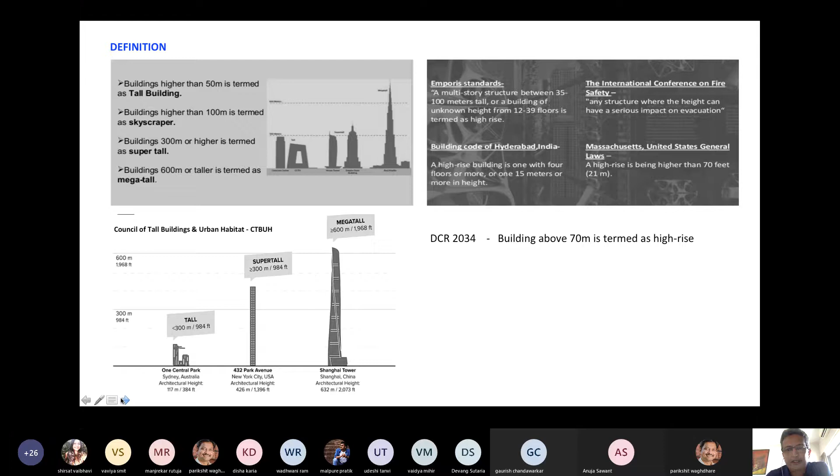Those are basically norms which you need to follow. For example, a building less than 70 meters requires only one staircase. Buildings above 70 meters require two staircases. Then there is a fire check floor, and the number of lifts increases. So those are the regulations followed as far as different DCRs worldwide are concerned.

Now, why is there a need to go tall? Number one is scarcity of land. Land is getting scarcer and scarcer, and there is always more demand to put more area on a smaller plot size, so the only option is to go higher and higher. Then there's always a demand for residential and office spaces, economic growth. Technological advancements is also one of the key factors driving high-rise buildings to go taller—advancements like steel buildings, composite buildings, prefabricated buildings, etc.

Then there is a human aspiration to build higher and higher. Everybody wants to stay at a height. Height is envisaged as premium—like if you're on the 20th floor or 30th floor, it's supposed to be some kind of prestige symbol, saying 'I'm living on so-and-so floor.' And then there is this race to compete for the title of the tallest.

There are many examples worldwide, like the Burj Khalifa in Dubai, where the tallest building has put Dubai on the world map. There was the Petronas Towers, which did the same thing for Malaysia. The reason for going tall is just to make a kind of statement—that's the basic reason. But as far as the Indian scenario is concerned, the reason to go tall is basically scarcity of land, nothing more, nothing less.

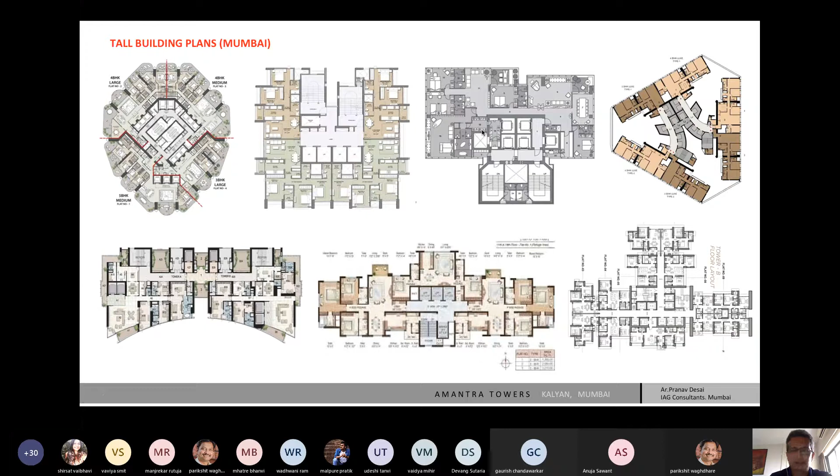Now these are the three projects which we have chosen from our office, because they are drastically different. The reason for choosing them is that all three are very different, having a different context, different methodology, different way of approach, and different design.

Number one is the Amantra Towers at Kalyan, which is an affordable housing complex, and it's again a mix of high and low rise buildings. Excalibur Towers is at Mahalakshmi, which is a luxury tower on a very small lot size—the plot is only around 1500 square meters—and we have tried to achieve a mix of the rehab component as well as the sale component.

And the third is the Vivaria towers, which are very high-end luxury towers with a very low density in terms of buildability. So basically we'll go through these projects and I'll explain how market forces, end user requirement, and construction technologies help govern the design of buildings. In my experience, these three are the most important parameters which influence the design of buildings. Other things like structural design parameters, sustainability, climate, form, etc., are basically byproducts of that.

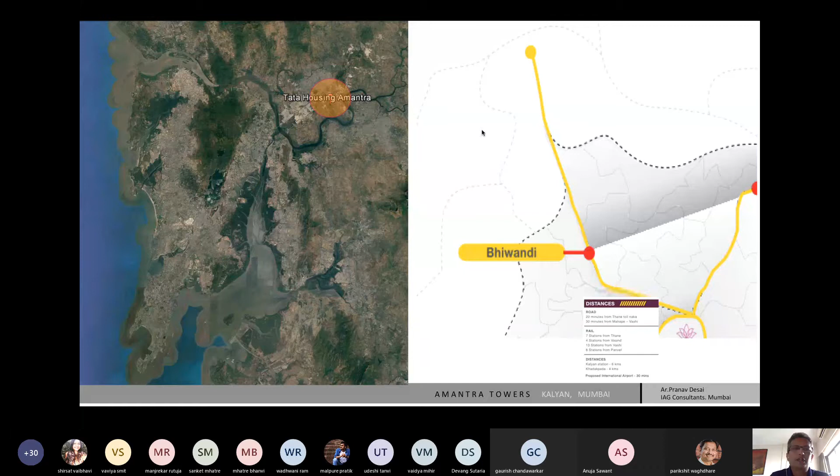So this is the first project, a project for Tata Housing called Amantra. The site is situated on a very busy road, in the junction of Kalyan—this is the Kalyan junction, and this is the road going towards Bhiwandi. This is basically around a 25-acre site.

Phase 1 is almost complete, we are just starting phase 2, and it's got a range of high and low rise buildings. There are around 11 35-story towers sitting on a parking podium.

Now this is the basic layout of the project, where you have to see phase 1 and phase 2. First, what we did is we aligned—when we started this project it was under the rental housing scheme by the government of Maharashtra. Rental housing is basically a scheme where the government allows you to build a higher FSI, provided one FSI you give for the rehab of people affected by, say, road widening, or people affected by slum clearance or any other infrastructure project.

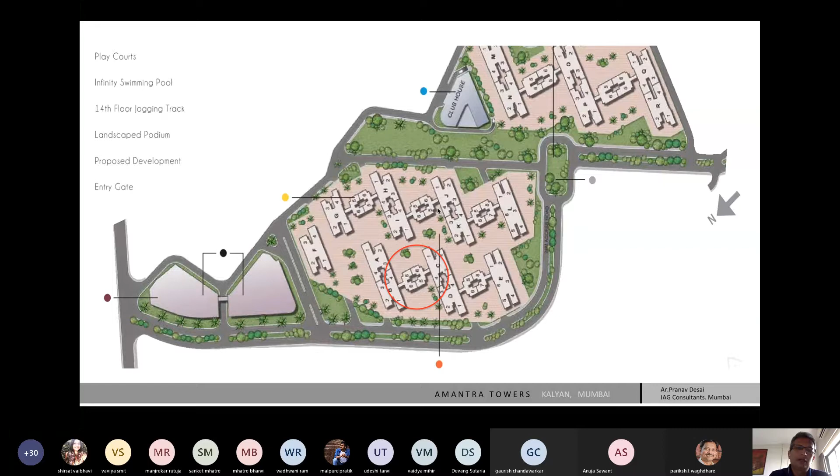So we developed a system where we did a low rise and high rise combination. The main reason was to develop a construction methodology where we plotted the radius of the crane movement and then plotted the buildings onto the site. So these 11 towers were constructed with the help of 6 cranes, which moved in a direction, and one crane was used by 2 towers. The location of the crane was in the center of the smaller building. Once the towers came up to like 12, 13 floors, then the work on the lower buildings started.

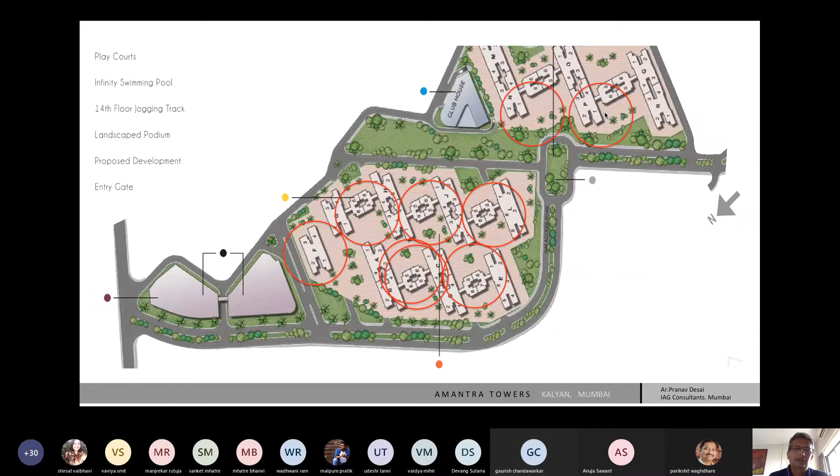So what I'm trying to tell you is that it's not the form, not the climatology, not the sustainable parameters, but the drive to use construction technology and methodology which actually evolved the design. This is how the project looks like, a combination of large towers - these are the 11 towers which are built - and then you see these smaller towers in between.

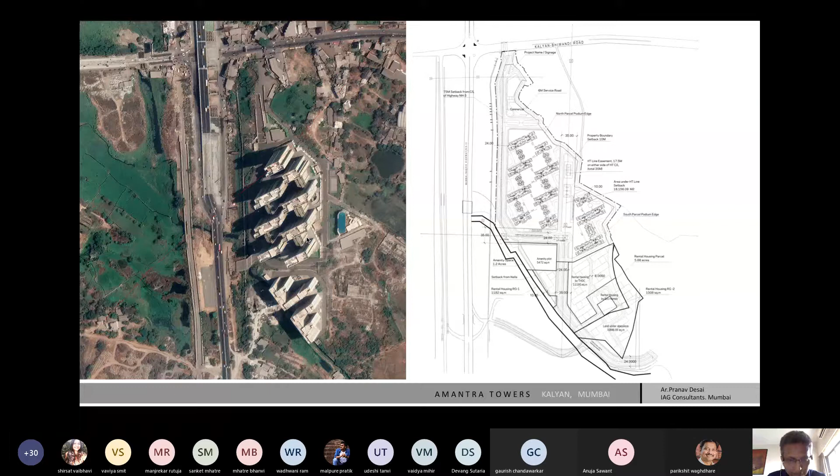So this is basically the configuration of how the units are placed on the site. Again, there is a method to this. It looks like total madness, but there's a method - intentionally 3 bedrooms are towards the flanges where you have the optimum view. The smaller units are towards the center. This is again market driven. 3 bedrooms require more premium and have a larger ticket size, so give them a better view, better location.

So the design is driven by market forces. What sells, that is put into the design. 2 bedrooms are towards the center, and you see all the 3 bedrooms are towards the periphery.

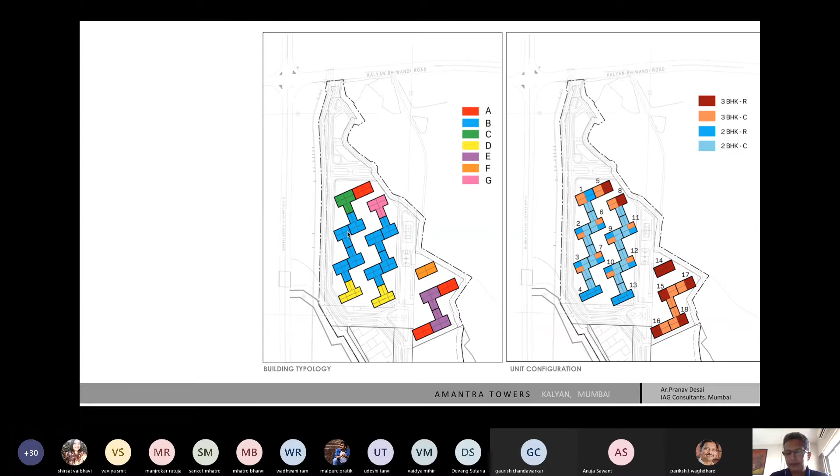Again, because we were using technology, we had to standardize the units. We could not do, say, a 2 bedroom and make 5 different varieties of 2 bedrooms. We needed to do 1 or 2 types and repeat that more number of times to get efficiency in terms of how the Mivan formwork operates, because for each tower we had basically taken one set of formwork, which was getting split into phases.

So you have these 11 towers which were built, 35-story towers, and the lower portion is the smaller building where the tower crane used to sit first and then operate these buildings. Once the buildings came up to say the 15th floor, then the work of these buildings started. These are called the bar buildings - I don't know why they call them that, but the client had called them the bar buildings.

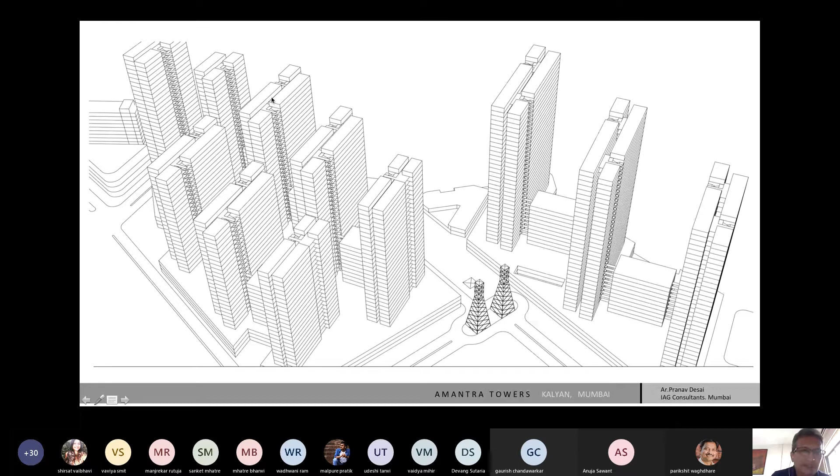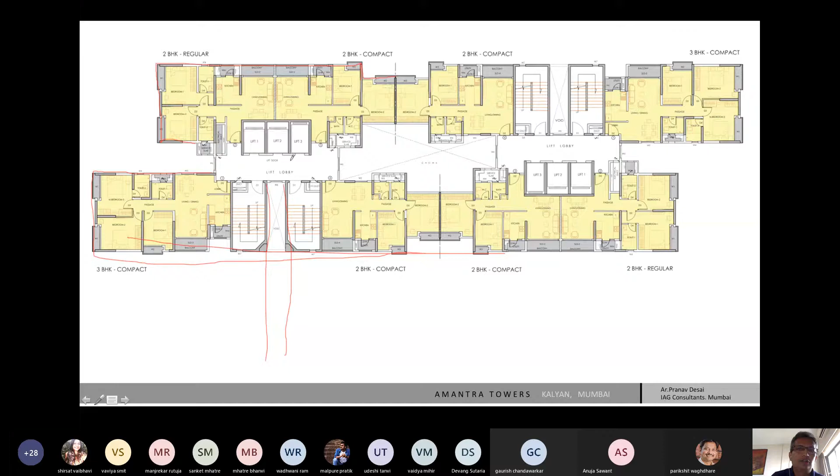So on the lower floors, it is 6 flats to a core, but when you go higher, above 12 floors, it is 4 flats to a core. So you can see this passage. So you have 6 flats to a core on the lower floors, and then these towers rise up to form four flats to a core.

And so there is again a hierarchy of the buildings. Whichever is going higher are the bigger flats, and whichever are remaining smaller, like the bar buildings which are 12 floors, those are the smaller flats. That also is driven by the market, because the compact flats have a lesser ticket size, so it will be more affordable and more efficient to keep them low rise.

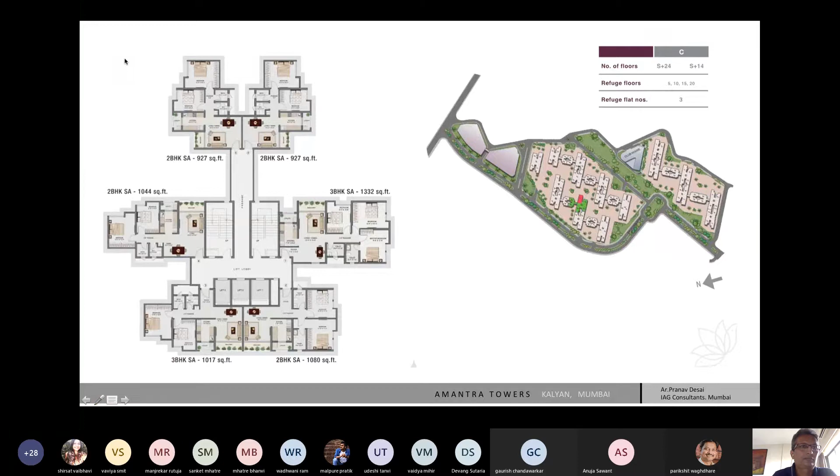This is again the same thing. It's four and two in the bar building, and then again this is the mirror of that. So you can see this. You have two staircases, 3 lifts. Again, you have very straight block kind of things. And this is the mirror. So the next building is just a mirror of that.

So when you're using technology, suppose there are 11 buildings, you need to try to keep 1 or 2 types. Because repetition is the key word here. If you don't have repetition in your design, then it becomes extremely uneconomical when you're using technology.

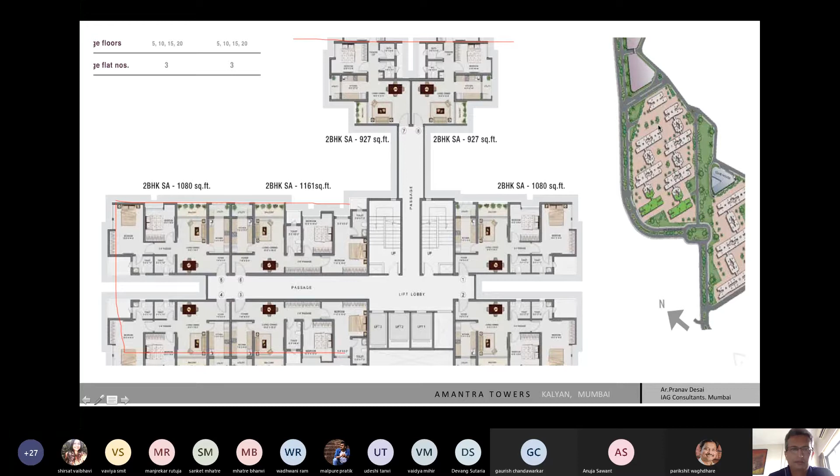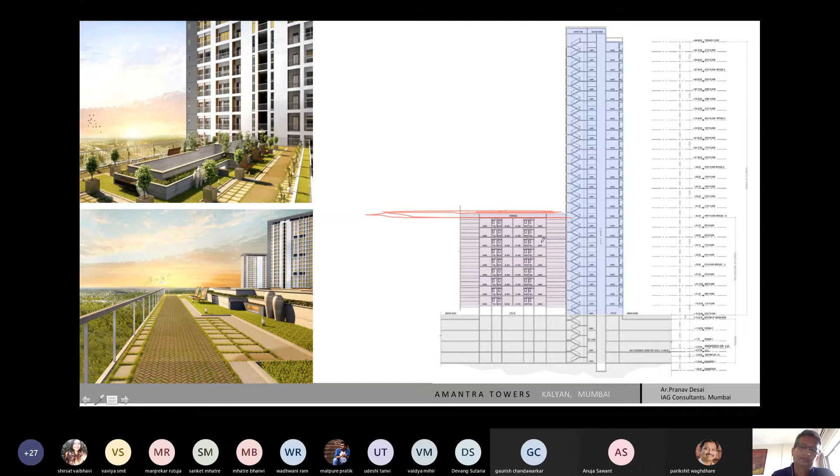Very few people will know this, because everybody thinks it is done mainly to achieve an interesting form, that because it's a 4 FSI high density project, the architect has done this staggering skyline, but the reality is very different.

And when you're doing tall buildings, another thing is that you basically don't have many options in terms of the facade because it's all concrete facade. From the ground till the terrace, the formwork has to basically go the same. From this level till the end, it has to go in one shot. So you cannot put any stick-ons or do anything which is superficial. At maximum you can work on the crown or on the lower portion of the building.

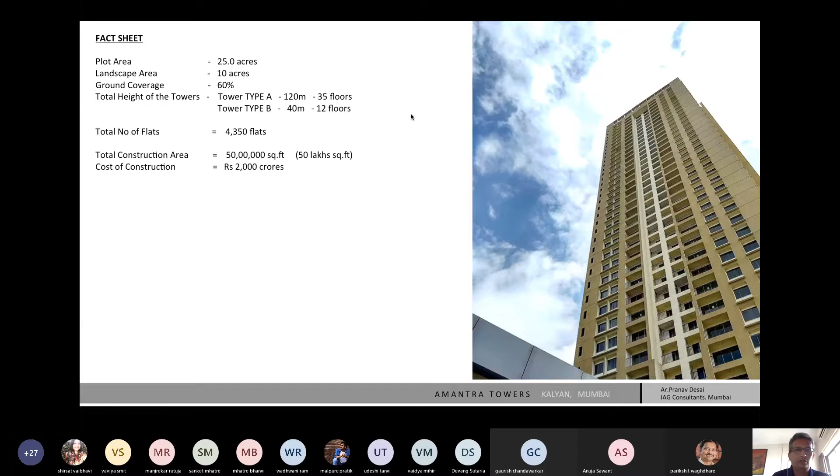And totally around 4,350 flats and around 50 lakh square feet was the construction area, and the cost was around 2,000 crores. So this is one of the projects which was in the affordable segment category. Now we'll move on to another project which is high end but high density.

It's a small building at Mahalakshmi. It's under the 33/7 scheme. It's a scheme by the government where you have a plot of land where there are tenants or tenements which are already existing. So you have to rehouse those tenements into a separate building and then create your own sale building.

So you need to basically carve out a space for them. At the same time, you can build your own tower. So normally, one is the density which is actually used by the tenants, and 3 is the density or the FSI you get for building the new project. Now 3 is the FSI, so total construction will work out to 7, 8 because of the parking, lift, staircase, etc.

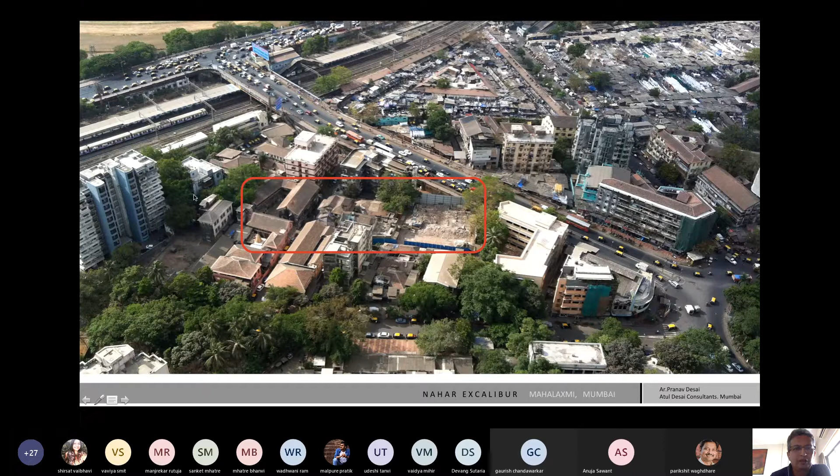So this is all market driven. Form comes later on. The condition is that every room of the flat should get this kind of a view. This is the site. You come down from the bridge. This is the access. Now this is a very peculiar site because it's a long site, but it is cut into two by this road. So you have this 1/3 land which is carved out, and the 2/3 land is in one chunk.

So what we did is that there are 2 rehab buildings which are shorter, only 70 meters, and the taller one is the sale component. So these 2 are the rehab buildings, and this is the sale building. Now we had to keep this building over here because this is the immediate access to the building. This is not a very good road, so we could not use this for the sale component. So we kept the rehab component on both sides of the road and built the sale component towards this side.

Now, even though the race course is here, we didn't have an option because of the site. We could not angle the building, because if you do that, then there'll be a lot of inefficiency in terms of the design, in terms of the parking. So we had to keep the building more or less aligned with the site. So that was one of the restrictions of this very, very tight site. So this is your entry. I'll just go to the typical floor plan.

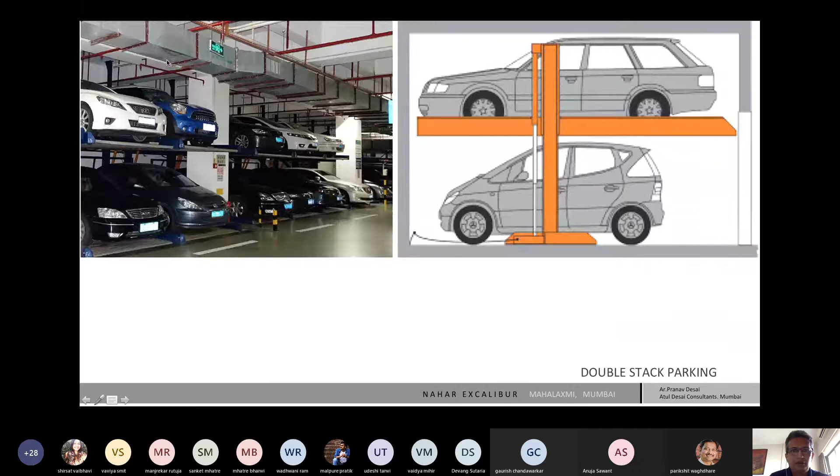It should be seamless. You cannot plan it in isolation. You cannot do a typical floor plan and then fit in the parking, because that will never work. So even if you see the grids, we designed the width of the bedroom such that you get 1 car parking. Then these columns were floated, so you get exactly 3 car parkings below that. Then the living room was used for the car lifts.

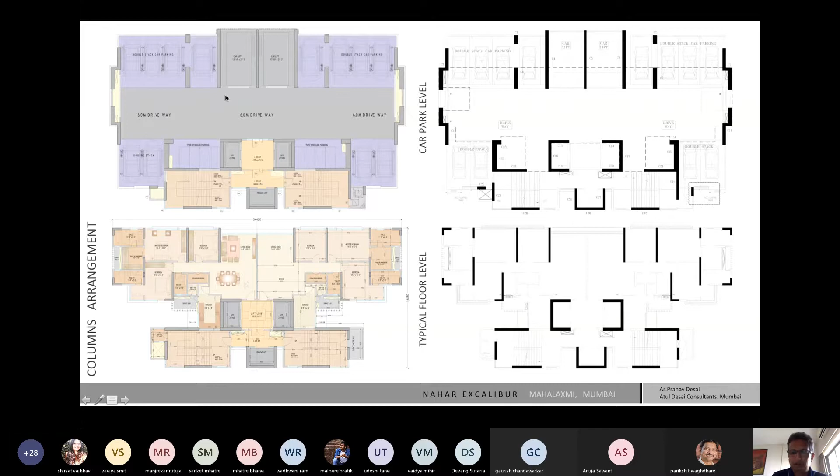So the parking structure below the tower was very, very efficient and required minimum floating of columns. There were certain floatings which were inevitable, but it was very workable. It was not something which the client would cry about. So this is your typical floor. The living room gets the view, bedroom gets the view, master bedroom. Even the toilets get the view of the racecourse and the Arabian Sea. Even this gets the view from the back towards the Mazgaon docks.

So what I'm trying to say here is that the planning is not done because of form. It's not done because of sustainability. It is driven, it is designed for the market. The market wanted that every room should get the view of the racecourse. So that is the reason why this typical floor is designed the way it is.

The end user requirement: if you wanted some flexibility, if these 2 rooms want to be combined, or if you want to increase the size. Now there are many who have redone this area. So you need to have this kind of flexibility built in. If they don't want a puja room, they don't want a servants' room, if they want to increase the kitchen, if they want to keep 1 walk-in wardrobe and make this a study. So all those flexibilities need to be built in the design stage itself.

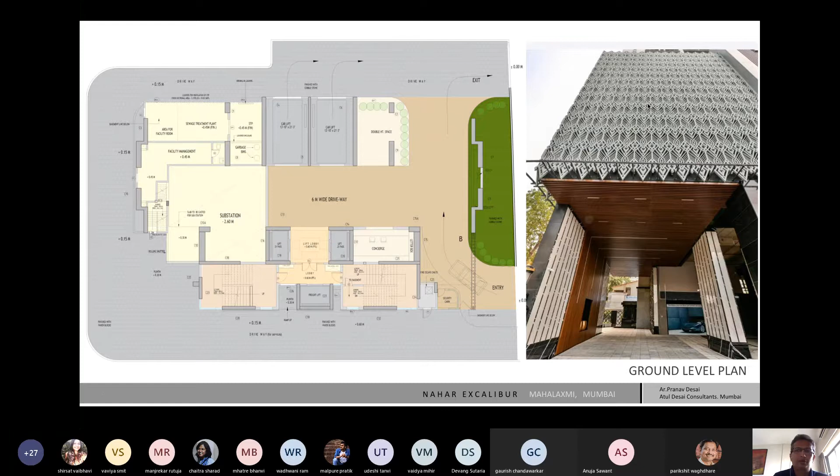So the design is going to get more and more complicated, where you have a rehab component, sale component, parking for the sale, parking for the rehab, amenities, etc. All clubbed in a lot which is actually half of what is required. So you enter into the porch. This is the large entrance lobby, double height, because even your entrance lobby needs to have a scale which justifies your building. This is the puzzle parking system.

And because the space is so tight, a lot of amenities are now pushed onto the terrace level. So the terrace is a community space where you have walking spaces. Some people have swimming pools and clubhouses on the terrace. Earlier the terrace was all services, but in today's day and age, the terrace is where all the recreational activities are coming up. At least in a city like Bombay, where the ground is all used up for parking and other things.

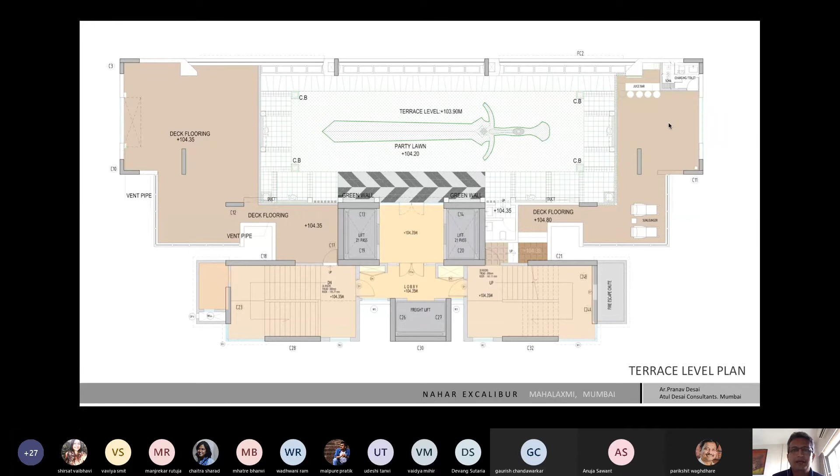This is how the terrace is designed. You have a lot of greenery, plus you get these outstanding views of the Arabian Sea and racecourse from the terrace.

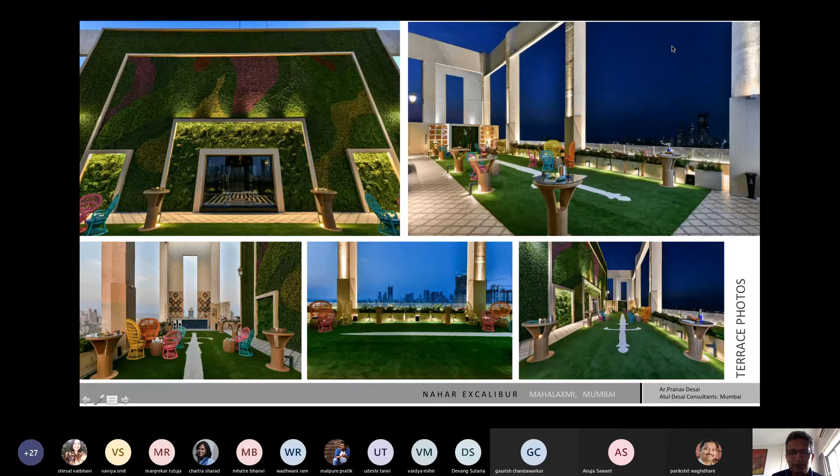Now, when you're designing the facade of a high-rise building, you need to see that maintenance is also a very big challenge. It's not like a small 7-story building where you can put up scaffolding and change whatever you want, or paint or break things. Once it's built, it's there to stand for years.

So normally what we do is that the lower portion, which is like 3 or 4 floors, and the crown are the only treatments given architecturally. The rest of the building goes simple, clean, straight cut, with not much fenestration. This is again a Mivan construction, an all-RCC framework structure. So there is no plastering; once the RCC is done, it's only painted.

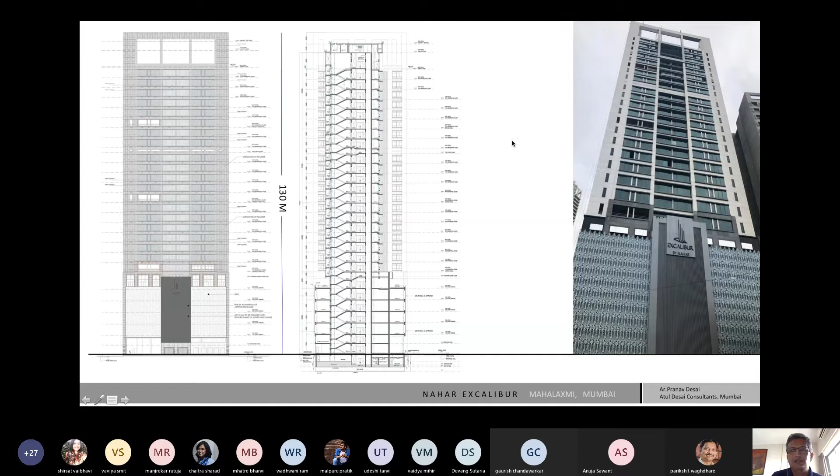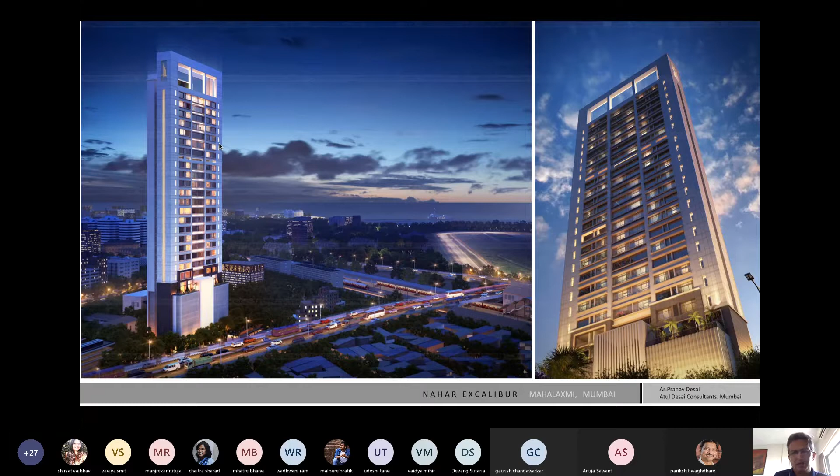So in most of the projects which we have designed, the principal approach is driven by the end user and the market, what the end customer really wants. Whether they want a 3-bedroom or a 4-bedroom, a larger living room, a walk-in wardrobe in one of the bedrooms. Everything is driven by the market, and there's a lot of research which goes in before the architect even gets the brief.

This project is called Excalibur. Excalibur is the sword of King Arthur, so the building is named after the sword, because it's tall, thin, and strong. That was the concept. So we picked up motifs from the sword and created this pattern in GRC, which was then put onto the entire lower portion of the building.

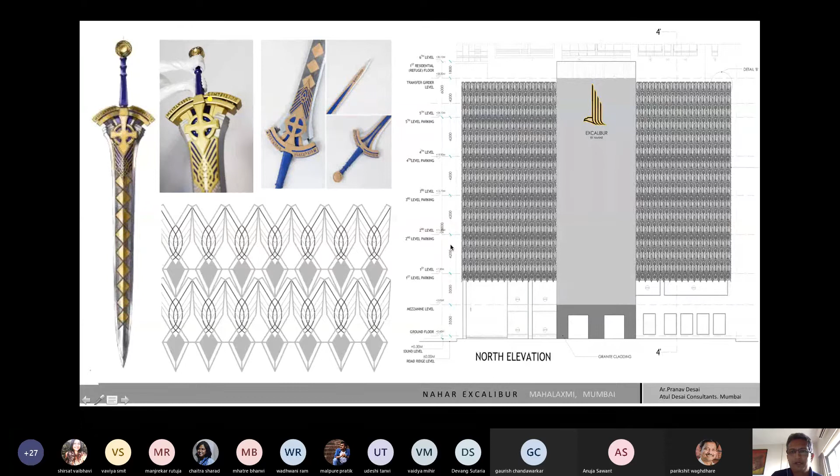This is the motif that was picked up, and then it was repeated, because this was done in GRC, and GRC becomes economical only if you get repetition. So this is one mold which is repeated many times. The entire lower portion of the building is this GRC jali. This is where the car lift is. And the overall building on top is very simple, clean cut lines, a little bit of cornicing, grooves. And then you do certain crowning on the terrace.

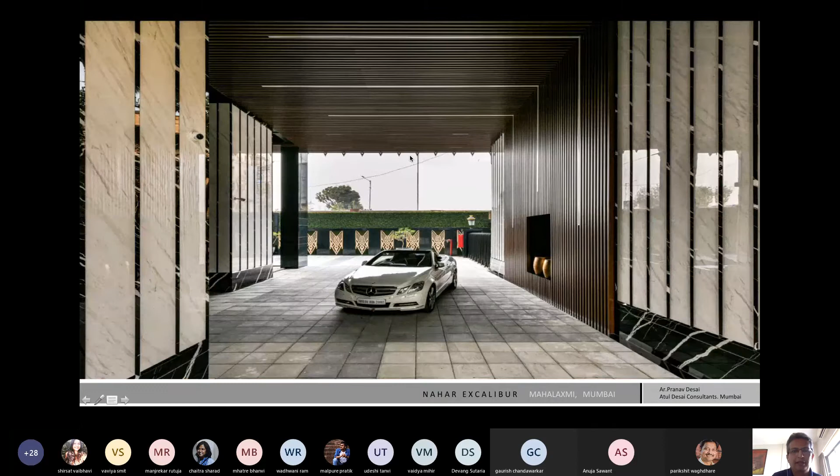Because it was a very large deal, they said, let us give him this kind of feature where in the skyline he can boast that these last three floors are his, by giving this light box, a square box, on the building. So there also is the end user dominance: whoever buys dominates. This was never a feature in the design, but because the end user wanted it, it was put in as a design feature.

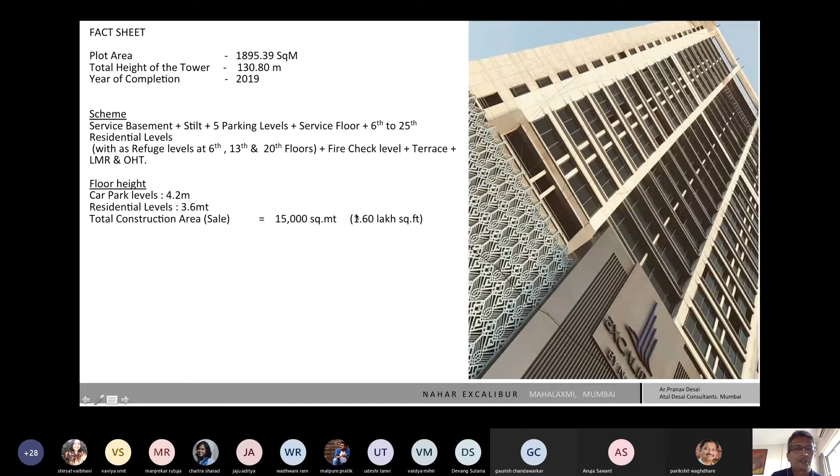So the end user plays a very important role in how you design your buildings. You feel that the architect is supreme, but it is not. The end user is actually the supreme. If you see, the plot area is only 1,800 square meters, the total is around 1,60,000 construction area, and the building height is 130 meters.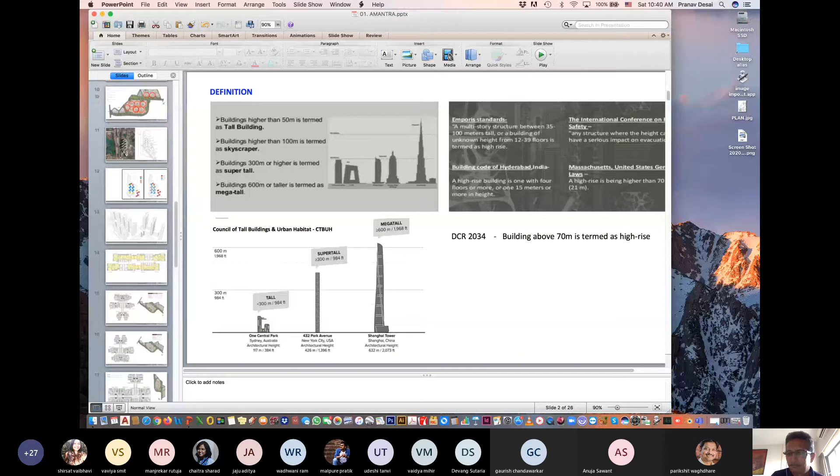So this was one of the smaller projects, and one last project which I'll show if we have time. Yeah, we have time, sir. The interesting case studies, one small one, another. This is also just behind this project. One more thing to show, this one small thing, because it's part of the context. So... I lost that presentation.

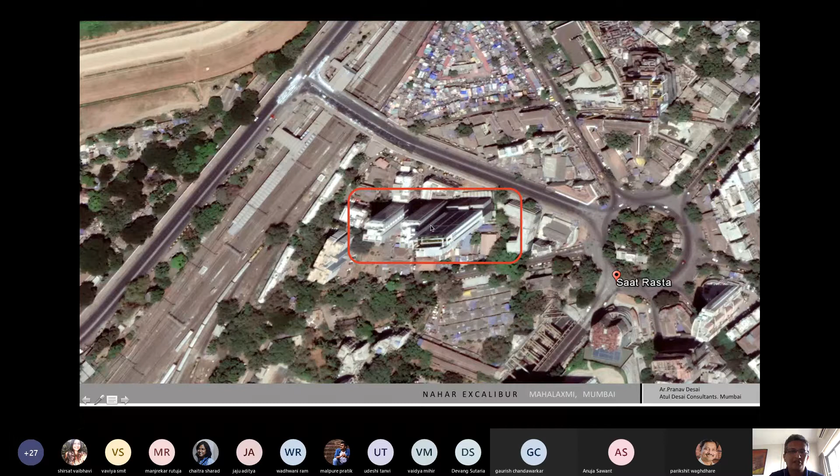Yeah, so now if you see this, this is the project I just spoke about. And when we got this project, we were already working on a project which was just behind. And that entire project, which is the Vivarea Towers, was facing this project. So because we were doing both the projects, what we tried to do is minimize the overlooking of both the projects.

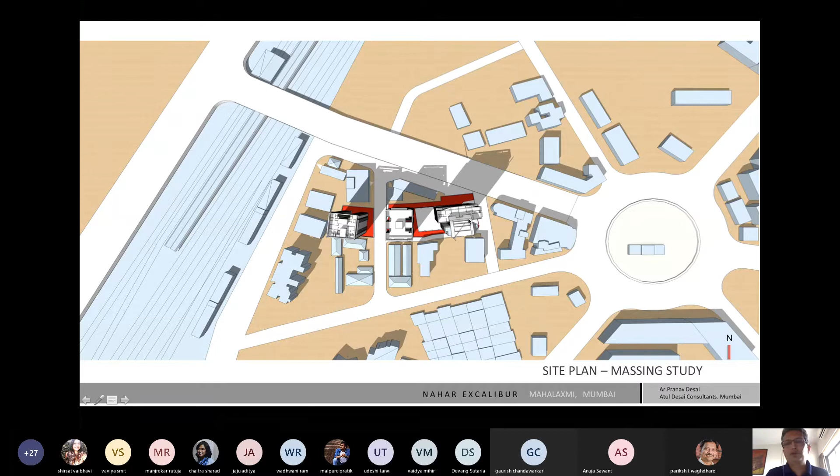We saw to it that this building doesn't overlook into the other building, because we could control that because we were doing both of them. So one of the reasons for putting the core behind is that these are all relatively dead walls which face the other project. So all the window side is towards this. This is all window side, and this is all dead wall side.

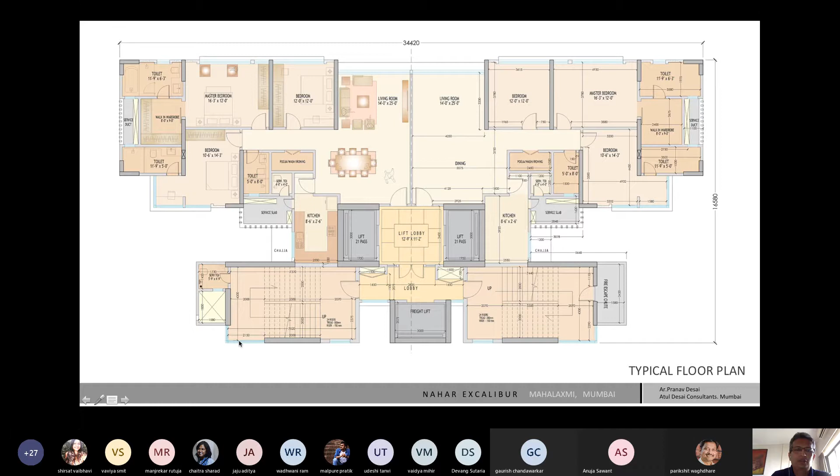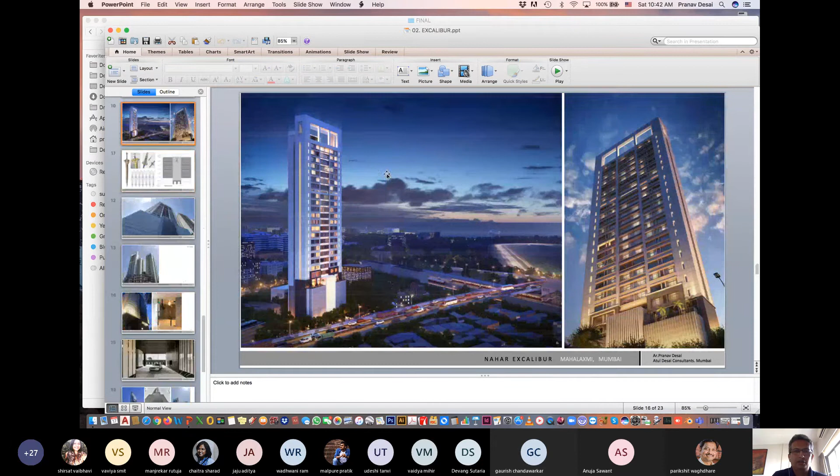So when somebody is looking from our other project, they cannot see into this building. The view is totally blocked off. So that is one of the contextual things which we could control because we were doing both. If you see this, the other side of the building is all dead walls.

Again, if you see, this is the view which everybody wants to capture. There's almost 3-4 crore square feet, all wanting the same view. So everybody is trying to maximize and exploit this view, because this is the only open space which is going to remain as an open space, and beyond that is all Arabian Sea. So again, this project has got this view.

And before we start the project, what the client does is take drone pictures every 7 floors. So they bring up the drone, and every 7 floors there's a 360-degree drone picture which is given to us, and we are asked to orient our buildings and our design according to that, because they believe there are 2 things which sell. Number 1 is the layout of the flat, what you're giving them in terms of the flat design. Number 2 is what they will see out of the flat.

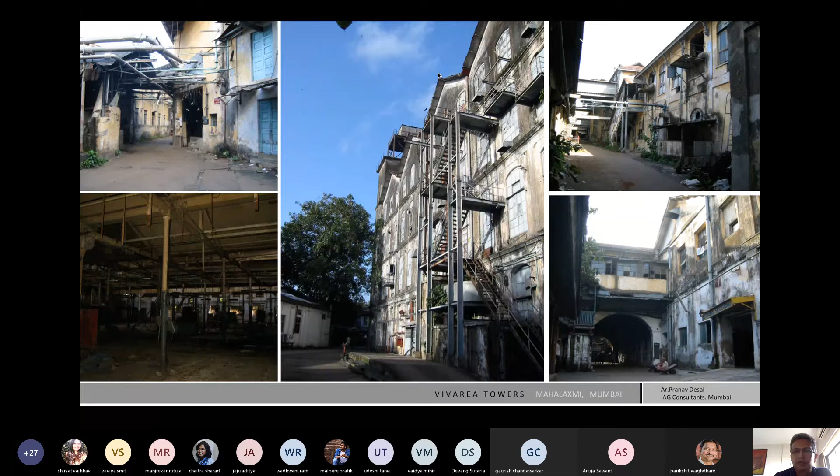Now this project is basically Hindustan Mills. It was an old textile mill, and there was this policy which the government brought out, where textile mills could be converted into residential or office complexes. So under that policy, the clients did a joint venture with the mill owner, and they came out to develop this into a high-end residential complex.

So this is the basic layout of the site. It's, I think, close to around 15 acres, where you have four towers in front and one behind. And when we started off with this design, we wanted to give maximum open space in the project. That was one of the biggest USPs which was considered. So we basically put the towers towards the road, and the entire portion behind was a very large open garden, a tranquil open space with a clubhouse, more like a recreational zone. And the entire site has got two levels of parking below that.

One reason for putting the towers in front was to give this large tower-free zone, so that the parking below doesn't have columns going through it, and the efficiency of the parking layout becomes more workable. As I told you earlier, you really cannot plan tower parking below the towers because there are these large, thick columns, the central core, and a lot of services running through, so it's not very easy.

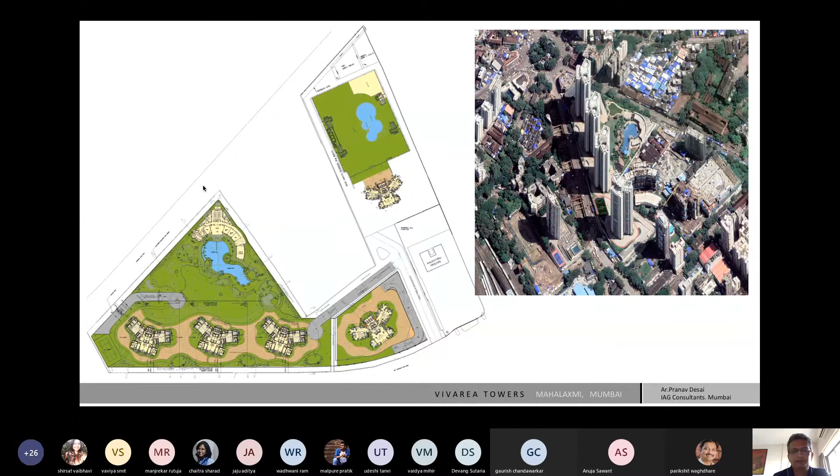This is the site before we came in. This was mill land, and the site was cleared fully. Once you develop mill land, you need to give a certain percentage as garden and a certain percentage to MHADA, so all those formalities were done, and then work on the towers began. First, this was phase one, where we worked on three identical towers.

Now this is the skyline from our side. It's extremely dense, with absolutely no greenery, no open space. This is South Bombay, so the plot sizes are small, and the building and the plot are virtually one. So there's no garden area, no area for kids to play.

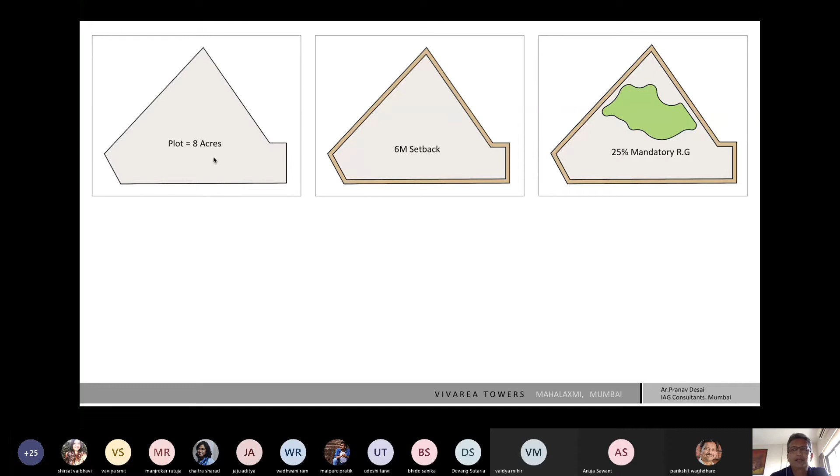So we thought, why not create something like a park within the complex itself? This phase one was basically 8 acres, and after leaving the setbacks and the 25% mandatory RG as per rule, we only built on 10% of the land. That's the reason these towers go so high. It's not necessary to go so high here; we've gone high because of the requirement of the market, the end user, and what will actually sell.

So only 10% of the project was built up. We put the required fire tender area around the podium and buildings, and everything else is recreational area. I'll show you pictures of that. Whatever additional light green you see is all green areas.

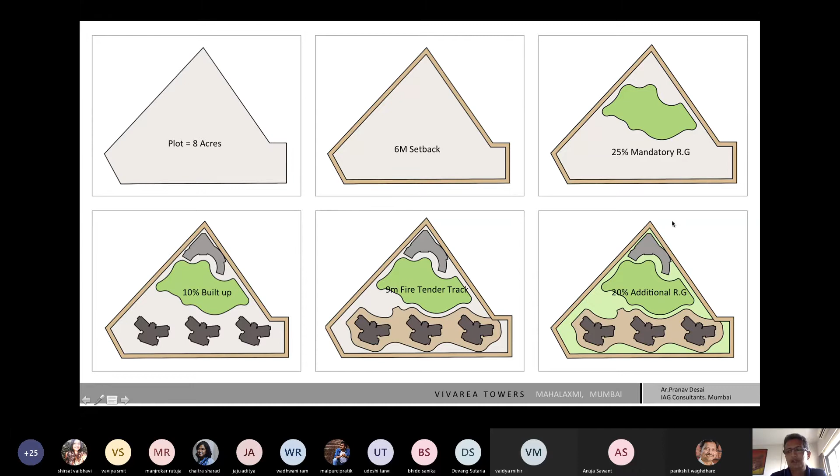So the top of the podium is like a large garden in which three towers sit, so it's the other way of looking at it - a garden with three towers sitting in it. You have a clubhouse at the corner; we intentionally put it there so you get large greenery with spaces for parties, sit-out areas, and a lot of landscaping. It's got a very large heated pool.

This is the fire engine track, which is mandatory for the design, and the entire site has 2 levels of parking below. You come up the ramp into a cul-de-sac and go down - this ramp is also there because of fire requirements, it's not for day-to-day use. Entry and exit happen only on the ground level, so this entire portion on top of the podium is a no-cars, total pedestrian space - just kids playing and elderly people walking around in the evening.

And they have these ponds where they've put fish, with music going on. Once you're in this space, you don't feel like you're in Bombay. That's what we really wanted to achieve.

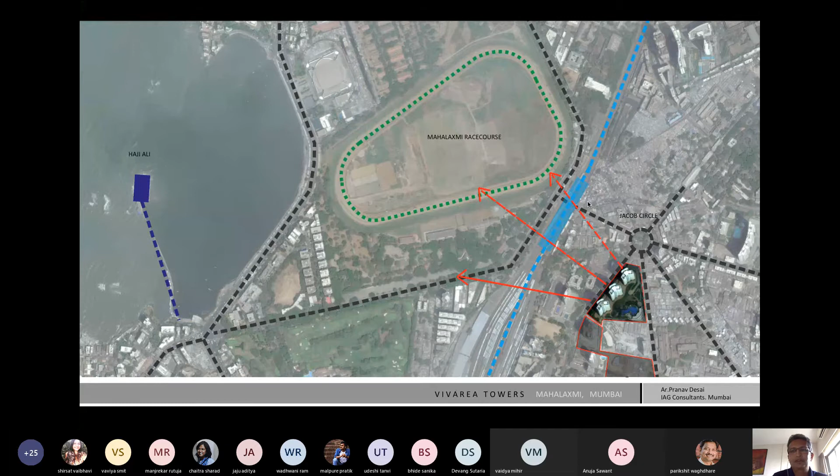I'll show you these connections on the typical floor. Every flat, every unit gets the view of the Arabian Sea. That's the reason for doing it - it's basically market and end user driven. We would not like a form like this, to be very frank, but it was generated by the site, by what was in front of the site, so it was a derivation of that.

So this is your typical floor, you have the 4 BHK and the 3 BHK, and this is the central core. Now this is off-centric, and you have these very flimsy connections in terms of the design, which is not a very happy situation for the structural consultants. But as I said, all this can be worked around. Your main thing is to get views.

All the toilets, bedrooms, guest bedrooms get views. This side you get the Mazgaon dock view. Intentionally this bedroom is pulled out so that you get views from this side and this side. So every room has got views. Here we have got a corner window, so you get 360-degree views.

Now each apartment basically sells for something like 15 to 20 crores. Somebody who buys an apartment with that kind of money will definitely want something which is talked about, like these large decks which are going on. Earlier these decks were free of FSI, so we have connected the bedrooms and the living room with these large 8 feet decks.

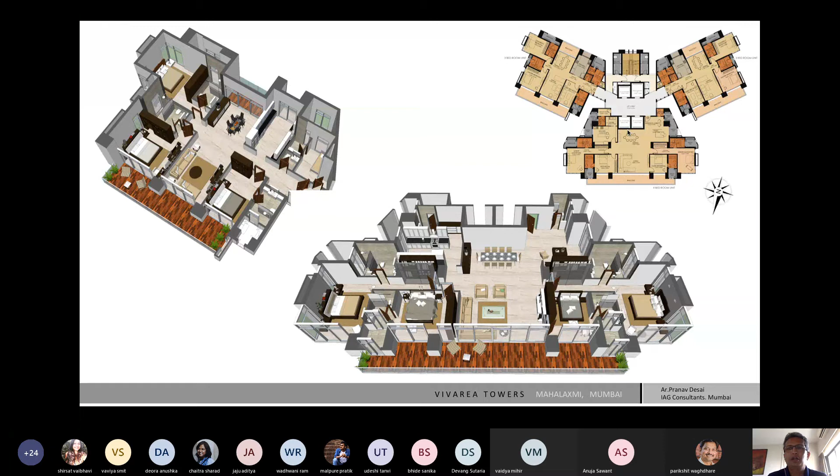There are 4 lifts into 5 towers, so an order for 20 lifts is given at one time. That's negotiated a year in advance, where they negotiate all lifts together so the cost comes down. So you feel this is all design, everything is design, everything is form, function - but there's a lot more to it. There's logistics, procurement difficulties, construction technologies, things that actually govern the design and how high-rise buildings are actually built.

Now this is the elevation of the project. The reason for showing you this is that when doing the facade of these high-rise buildings, the lower portion is very clean, straight cut. Maximum what you can do is a certain design element on the lower portion and the higher portion. The rest, 90% of the building, goes straight from the first residential floor to the last residential floor. The reason is the use of the Mivan technology.

You cannot alter anything in this area, because the formwork is already made in Malaysia - for this project it was done there. You have to sign off on the formwork - every groove on the facade, every window size, every switch box in every flat, everything is predetermined and signed off. There's a mock-up done in Malaysia, and engineers and architects go there to sign off. Once it comes to the site, there's absolutely no chance anybody can modify anything. Even if you feel there's a mistake and want to change something, it's too late - it just gets built, year after year.

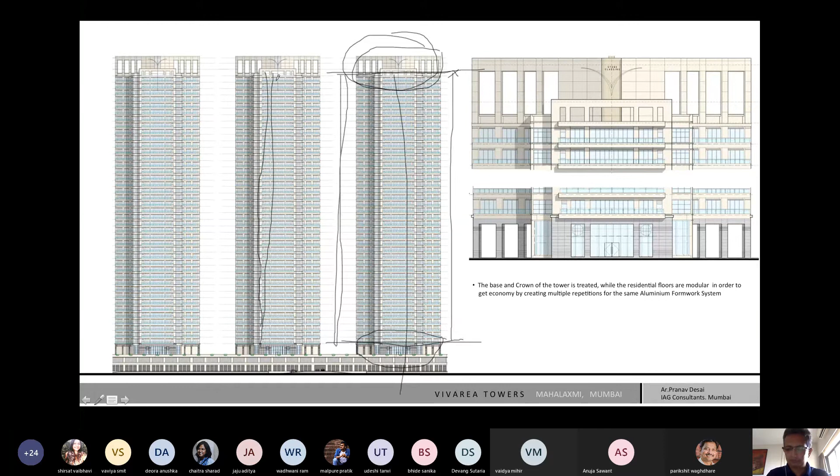Here again, if you see, we have the 3 towers. The reason for taking it at one edge of the plot is to give efficiency in the parking. So if you see, there's a very clean-cut, efficient grid for the parking, which is not interfering with the column design, with the columns of the tower.

And another thing, if you see, there is nothing much happening in terms of parking under the towers, because it has got these very heavy-duty columns, lifts, staircases. There are lots and lots of services. This is where the clubhouse is, and this project also has a very advanced garbage collection system. It's not like the jamadar goes to every house and collects the garbage in a bucket. Here they put it into a refuse chute,

and automatically the garbage is collected under each tower, and with the help of these mover systems, kind of conveyor belts, garbage is collected in one room behind, which is the garbage collection room, and from there the municipality trucks come and take it. So it's done so seamlessly that you don't even know there is such a large population generating so much waste, and you really don't see anything when you are in the complex.

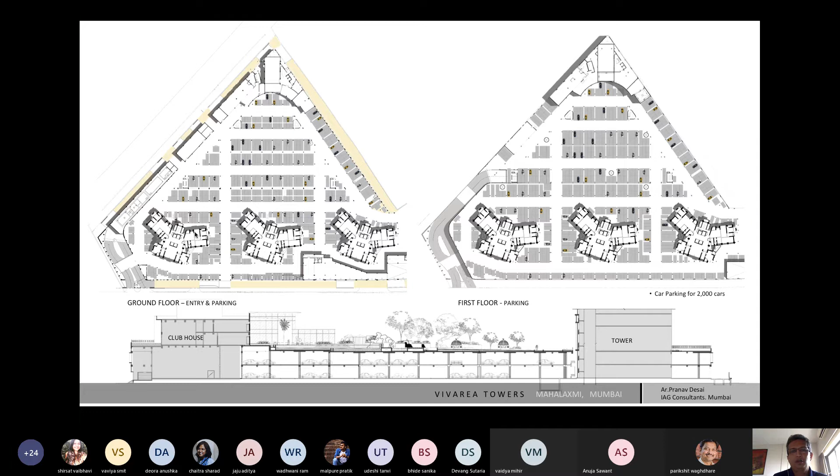And for these towers, there were 3 different formworks which were bought from Malaysia, and these 3 were constructed all together, and then we modified the formwork of one of the towers to construct the 4th one, and the same one was used for the 5th tower. So the reason to do similar towers was to achieve efficiency in terms of the formwork. So the overall formwork cost on the entire project per square foot reduced.

This is the building construction. What you see on the top is the aluminium formwork system, where the entire tower is in concrete. So there is no brickwork or plaster happening anywhere in this. Everything you see of the tower which is painted is concrete, and internally everything is also concrete, and every 9 days the formwork is removed and put up onto the upper floors.

Now in this project, what we have done is only the external core, external walls, and the columns and beams are taken in as Mivan shuttering, because these are very high-end flats, so there has to be a certain amount of flexibility built in for the end user. Like they would like to make the bedroom bigger or living room bigger or things like that.

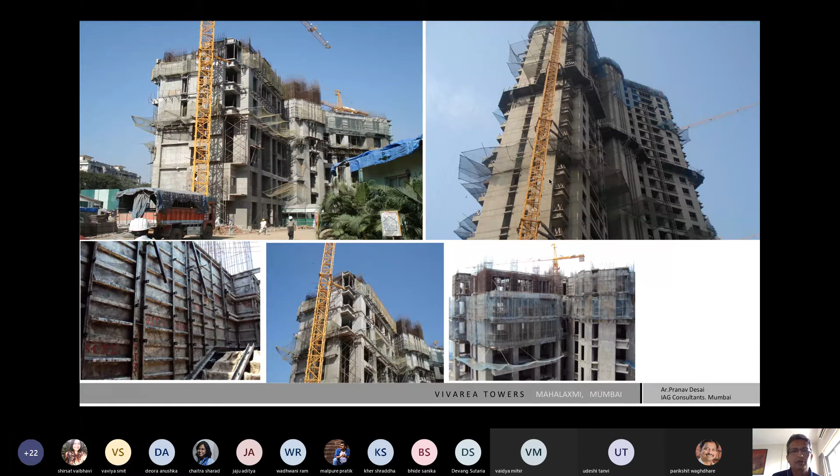But when we are doing low-cost housing in Mivan, like other projects, every wall on the floor plan is an RCC wall. So the project virtually does not have any brickwork and plaster. Everything is RCC. But in this project, we could not do that because of the end user requirement, because they wanted a lot of flexibility. You have these celebrity interior designers coming in and changing layouts. So all that needs to be built in. Somebody who's buying a 20 crore flat will at least spend 2-3 crores on interiors. So they should have the ability to do it.

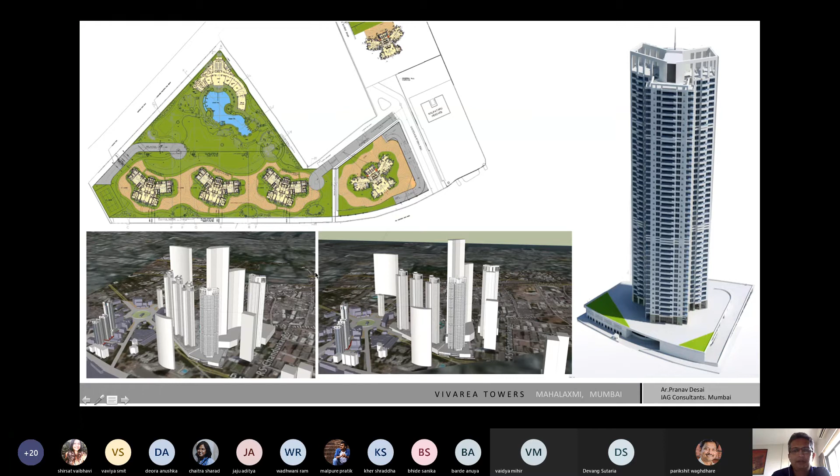But another thing we need to do is that because these are high-rise buildings, we need to go to the high-rise committee, where we have to plot the tall buildings within 500 meters around our plot and do a wind tunnel test, after which the structural designer assesses the structural loads on the tower and gives us the final design of the structure. So the wind tunnel test is very important, where you plot the different buildings around your plot and the heights of the buildings. And this also has to be a part of your submission to the committee.

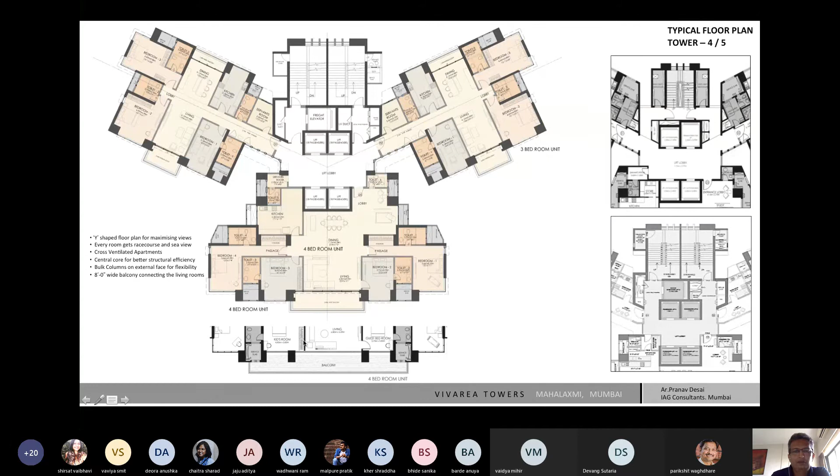If you see, the plan is very similar, but the balconies which were there in the first 3 towers are gone, and now it's only in front of the living room because of the change in the DC rules. So now the developer cannot afford to give large balconies because it comes into FSI. Because this was so well celebrated and was the USP of the design, they wanted to give the balconies, but the size has been reduced and it's only in front of the living rooms.

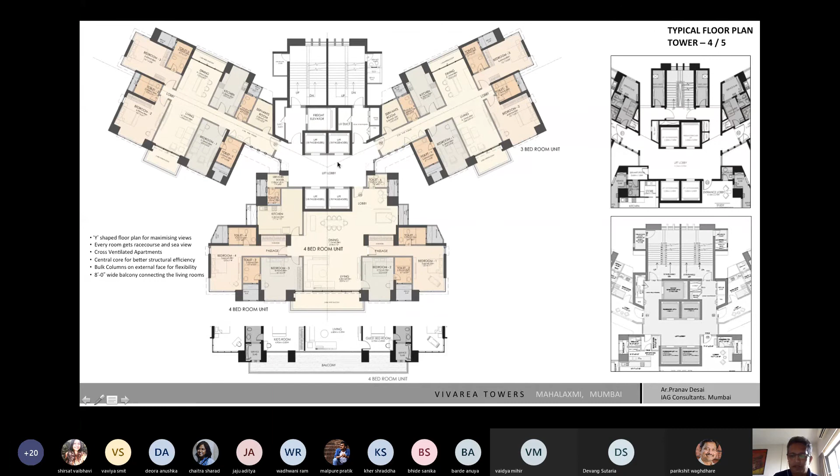This is how the 4th tower is under construction. Each tower has got at least 2 or 3 tower cranes where they lift materials up and down. You can see that the first 3 buildings are fully operational and occupied, and the 4th one is under construction.

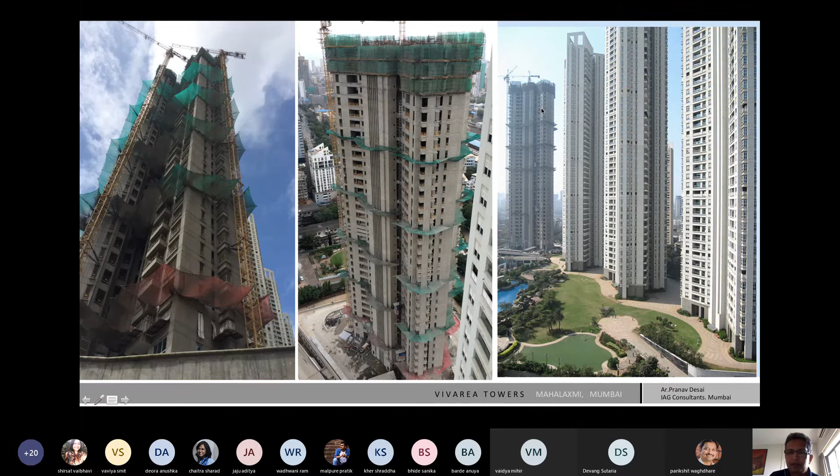The last tower is the 5th tower, where the design is more or less the same, but this is under the public car park, public lot. So what the government says is that you can get additional FSI if you build a public car park for the outsiders, not only confined to your plot, and 50% of whatever you build, you get in terms of FSI to build.

So basically, what we have done is that we have built a very large parking lot, around 2,000 cars. So the area is around say 8 lakh square feet. So 4 lakh square feet we get to build, which covers the area of the tower. So that is done behind this. So this is like a slightly inferior kind of a plot because it's behind. So you get this entry.

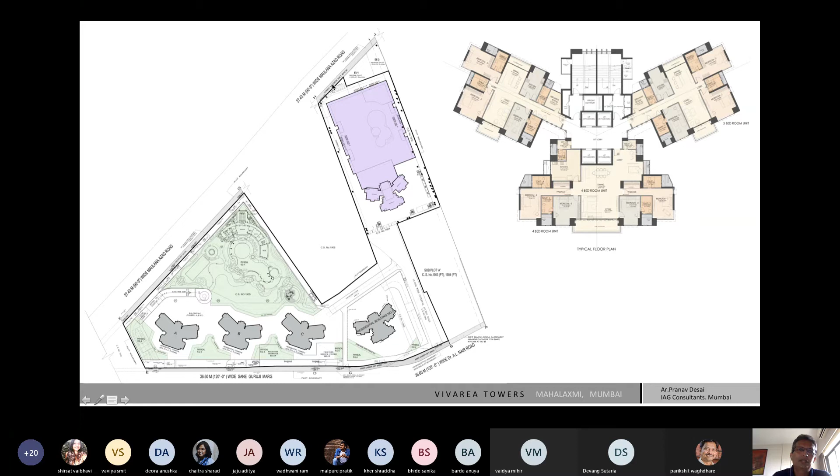These are the first 3 towers. You come inside and then you have this tower behind, and then you have the public car park, which is basically attached to it but behind. And the top of the public car park is basically a green space, with access from the road behind. This is the Maulana Azad Road from behind.

So in terms of design, whatever you see in blue is all public car park. It's all public, anybody can go there and park their car, and whatever you see in red is for the developer. So for the building parking, the first 4 levels are public car park, and then the top levels are the parking for the tower.

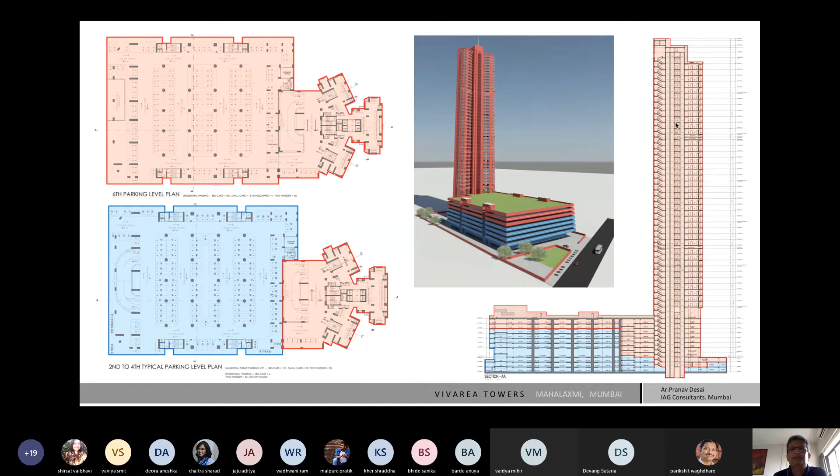Now this is a slightly taller tower compared to the other 4 towers, which is now under construction, now 15-16 stories high, already built. This is how they are marketing it. In every brochure they are marketing the view of the sea, the view of the race course. So the design also needs to complement that. It cannot be done in isolation.

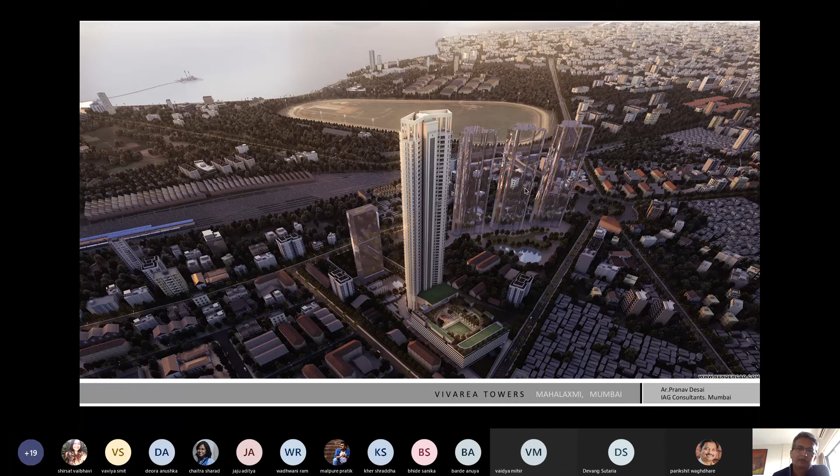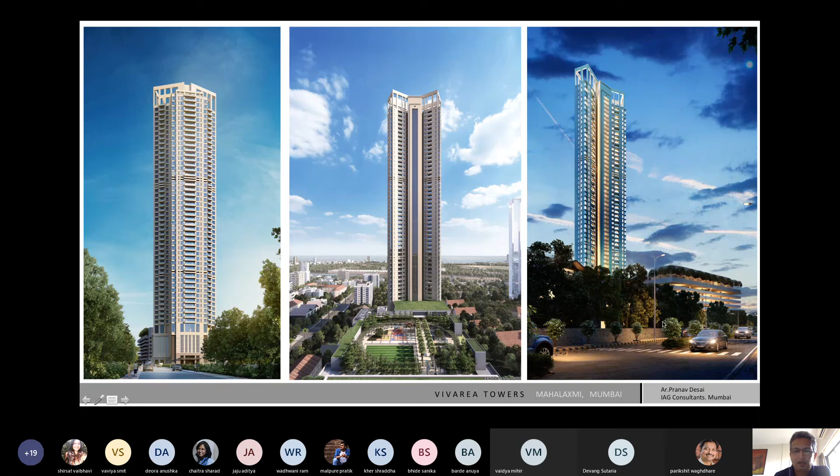These are the renderings of the tower. Again, you see just the lower portion is treated. The rest of the entire portion is clean, and then the crown is treated again. And the top of the public car park is all green spaces. It's fully a green oasis with walking, jogging tracks, fountains.

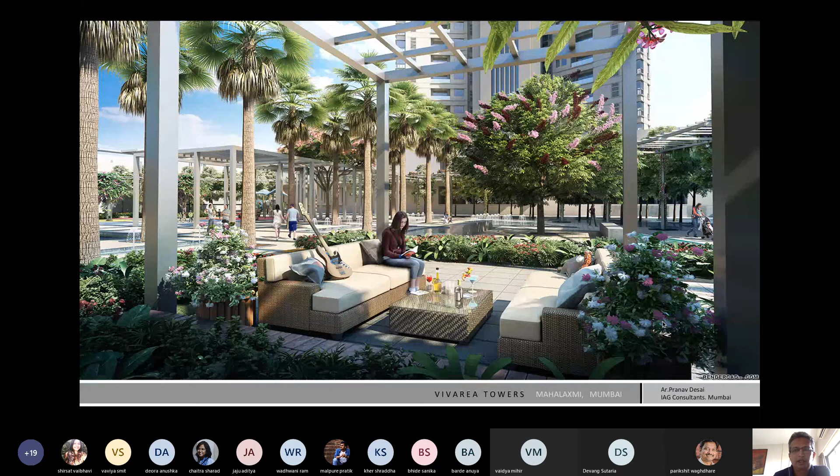These are all artificial trees. There's a lot of leveling happening. And these are all real trees. We have made a soil fill of around 1.5 meters. This is the landscape design which you see from your flat, and this is what is getting built now. You have this kind of a track with different green spaces. This is a separate clubhouse which has all the sports facilities like squash courts and things like that.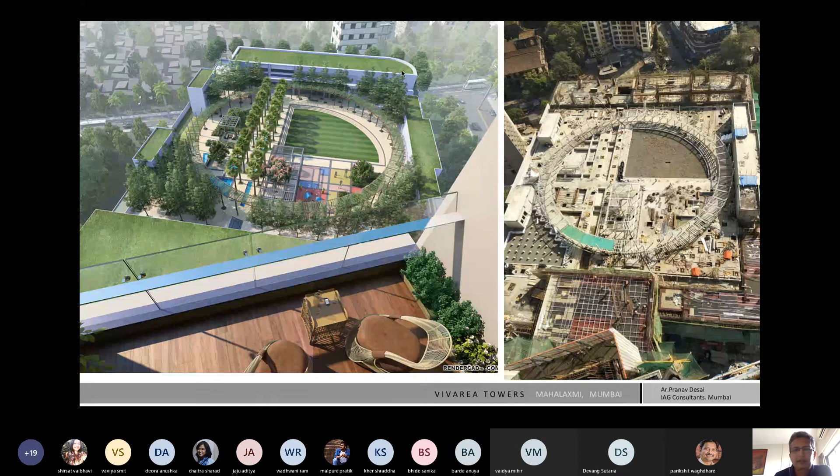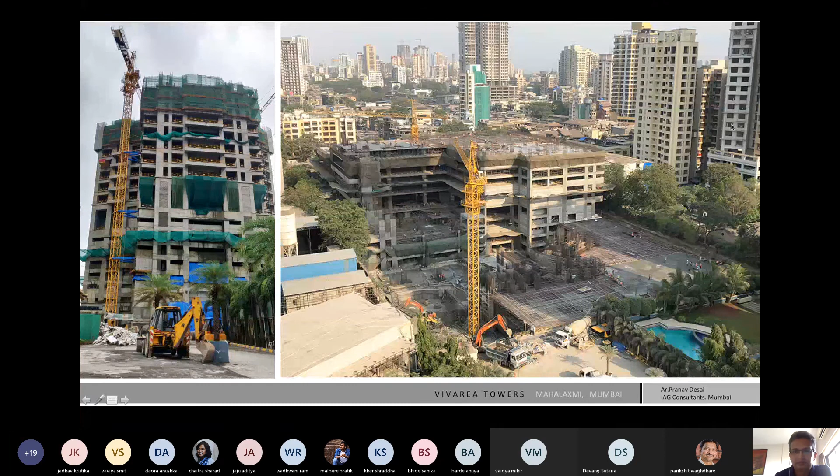This is the building under construction. There you see the public car park which is getting built, and then the tower in the front. This is how the project sits in the skyline of Bombay, like 3 towers. The 4th one is now already built. This is an old picture, and the 5th one will come, still under construction.

So you have 1, 2, 3, 4, and this is the 5th. The 5th one is slightly taller. It's 60 stories high, and the first 3 are identical. This is 45 floors, and this is around 60 floors. You have the first tower, which is 45, second 45, third 45, 4th is around 50 floors, and the 5th is 60 floors. The 5th tower goes to 235 meters.

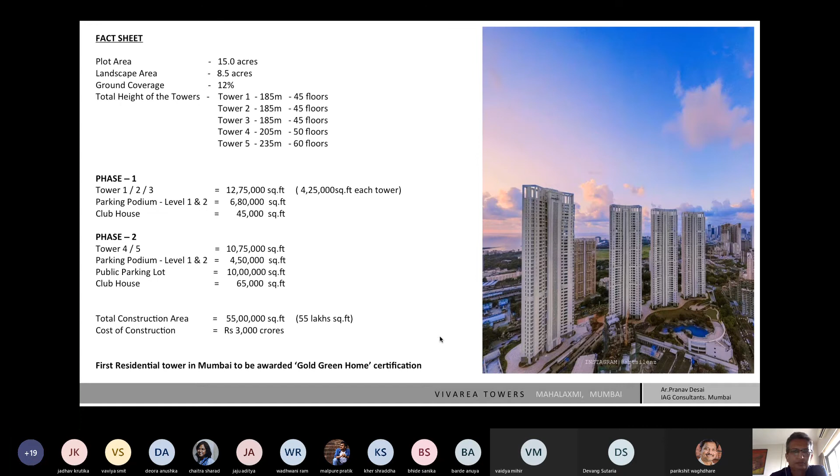The total plot is around 15 acres, total construction area is around 55 lakh square feet, and the cost of construction is 3,000 crores. And this is the first gold green home certification to be awarded to a residential building. And this project has won numerous awards from the institute, from the real estate fraternity, you name it.

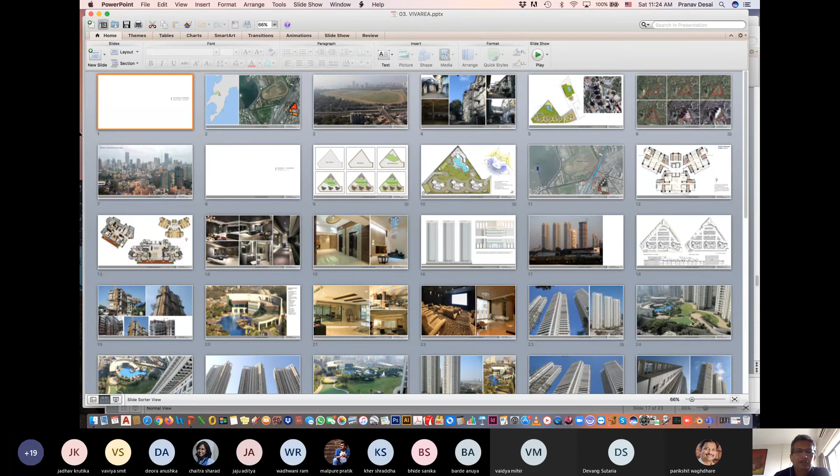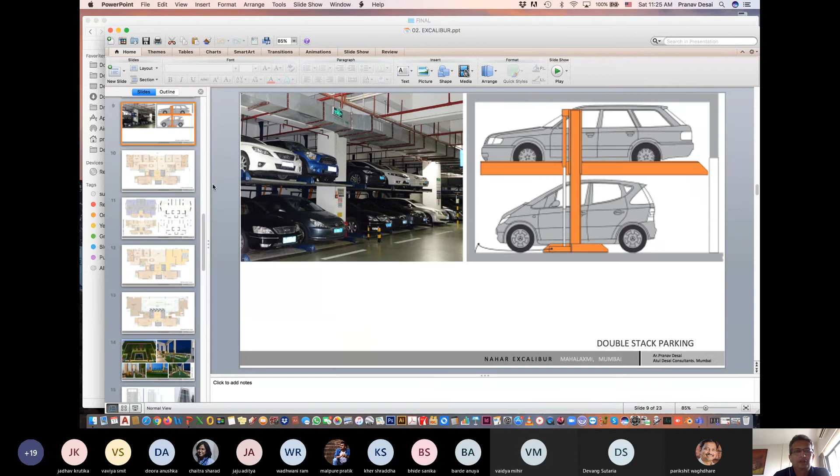So thanks, this was what I had to share. And so coming back to what really influences the design. What influences it is the market forces, number 1. Number 2 is the end user requirement, and number 3 the use of construction technologies. This is what we have learned and seen in these 3 projects of ours, how these 3 factors have influenced the design. These projects were very different from each other, and that was the learning.

What we had is that ultimately, sustainability, structural design, everything is a byproduct and can be worked around, but market forces and end user requirements are something you cannot work around, and you need to build that into your design.

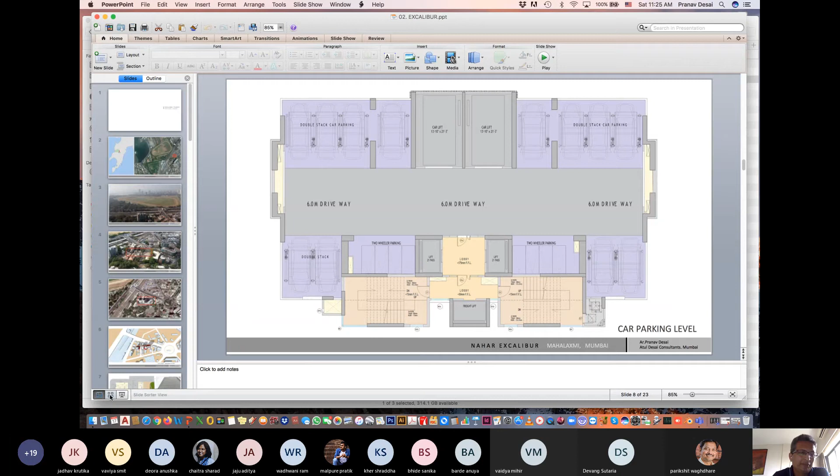I have received a couple of questions. I'll just pick up one because that was your concluding statement, so the question is, as an architect, what is the priority: architecture forms, or economy, or market demand? So that's exactly what I'm trying to bring into the... yeah.

What I was trying to tell in the presentation is that we are always taught in colleges, even I was taught the same thing, that you always start the design with form and function, and climatology and orientation. But when you come into the real world and when you're designing for developers and users, and when the stakes are so high, the developer is going to sell something which is like somebody's lifetime earnings. It is not 1 crore, 2 crores. It is like 20, 25 crores.

So everything boils down to what he is expecting. He is expecting this unobstructed view from the balcony. He's expecting world class amenities. He's expecting world class construction. So all that has to be built into your design. I'm not saying that form and function is not important. It is important, but it is like a byproduct.